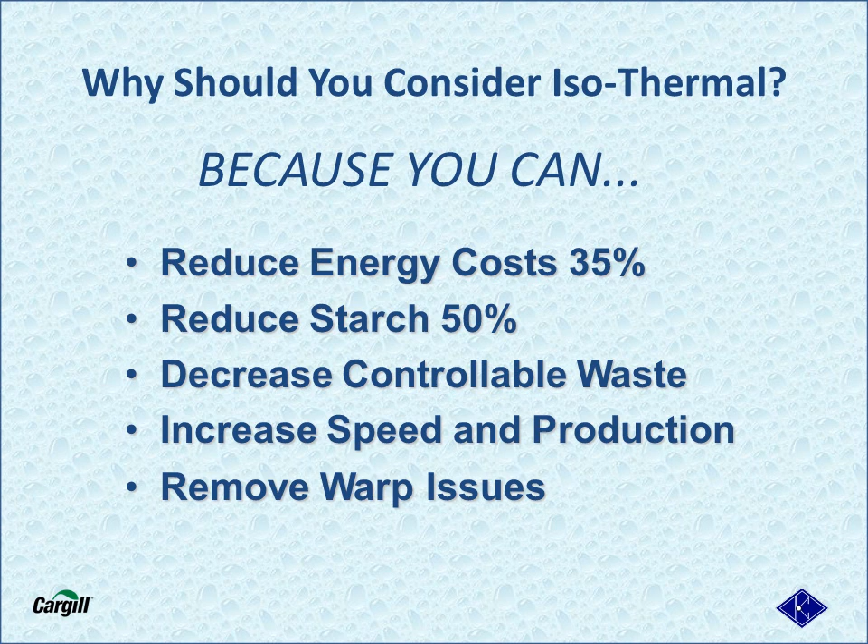Do you think these production improvements are achievable while still producing a flat board with equal or greater ECTs and pins? The answer is yes. If you're interested in better board, reduced waste, lower production costs, and higher profits, then take the next 5 minutes to learn how it's all possible with the isothermal process.

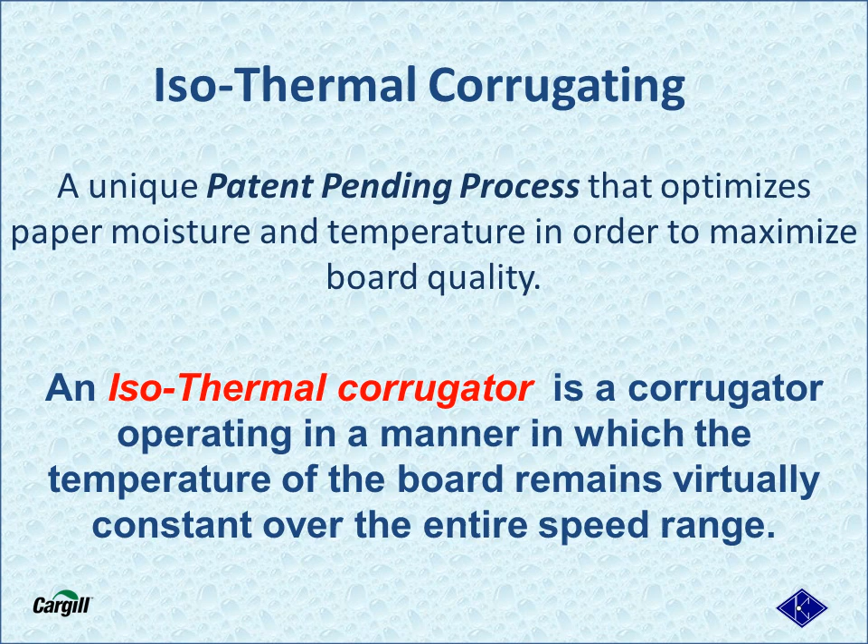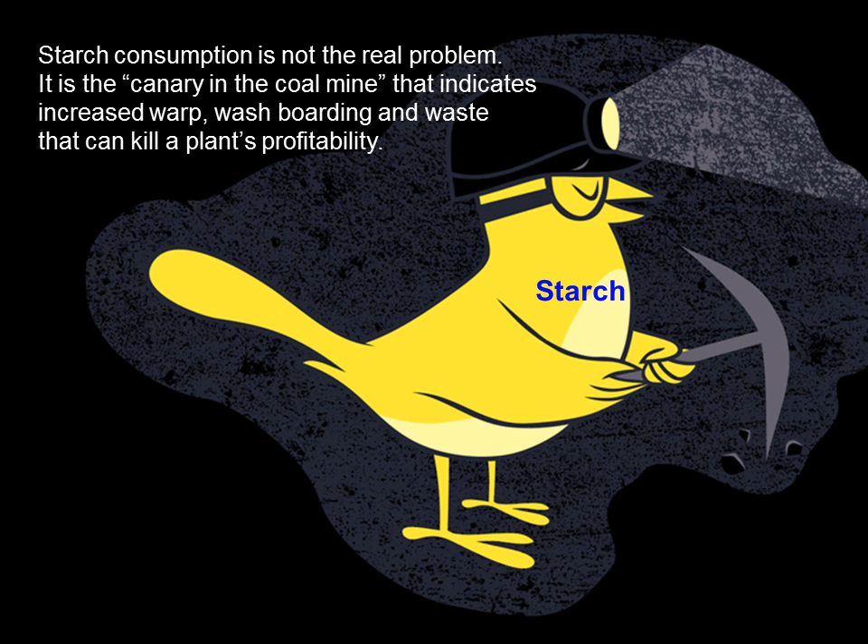Isothermal corrugating is a unique patent-pending process that optimizes paper temperature and moisture in order to maximize board quality. An isothermal corrugator is essentially a corrugator operating in a manner in which the temperature of the board remains virtually constant over the entire speed range. Starch consumption is not the real problem in corrugating. It represents a very small fraction of your overall costs, but it is a tremendous indicator of whether or not your corrugator is in control.

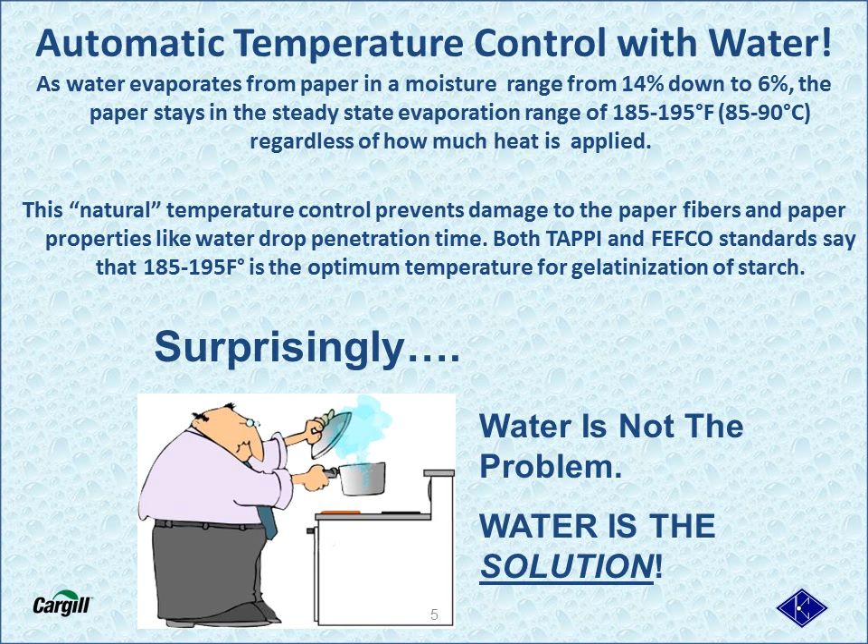Isothermal corrugating essentially provides automatic temperature control of the process by using water at its evaporating temperature. This natural temperature control will prevent damage to the paper fibers and properties like water drop penetration time. Both TAPPI and FEFCO standards say that 185 to 195 degrees Fahrenheit is the optimum temperature for the gelatinization of starch. This is the temperature that we maintain by applying a thin film of water to the medium and liners. Surprisingly, adding controllable moisture is the solution and not the problem.

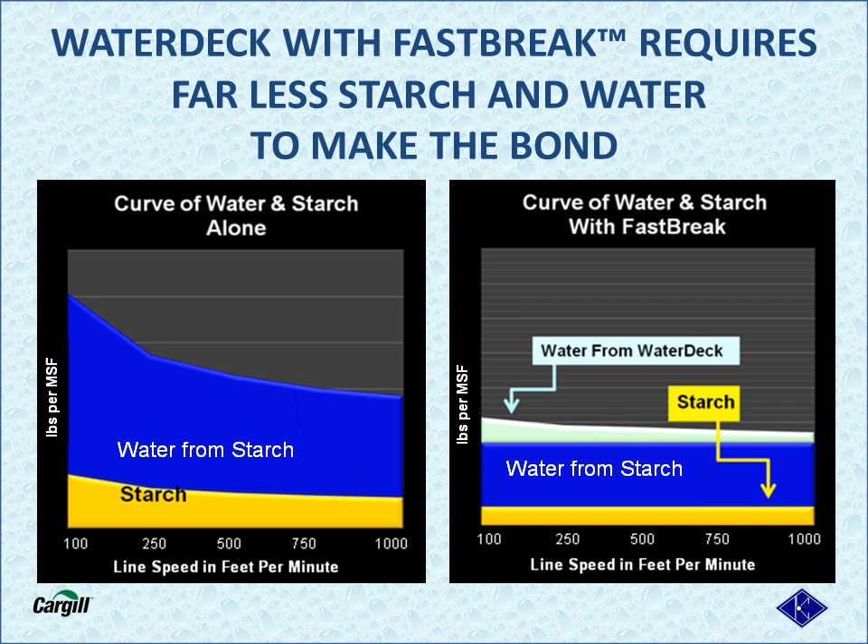If you take a look at these two graphs, they compare the curve of water and starch consumption on a traditional corrugator on the left and with an isothermal corrugator on the right. A traditional corrugator puts a lot of water and a lot of starch on at the lower end of the speed range. Isothermal corrugating enables you to flatline the starch at all speeds. Isothermal corrugating uses less total water during the entire process, and we adjust for the effects of speed and temperature by using the added control of the water decks.

There are 3 simple steps that are involved. Apply water, apply heat to the side that you applied the water, and then apply a rheology-modified adhesive.

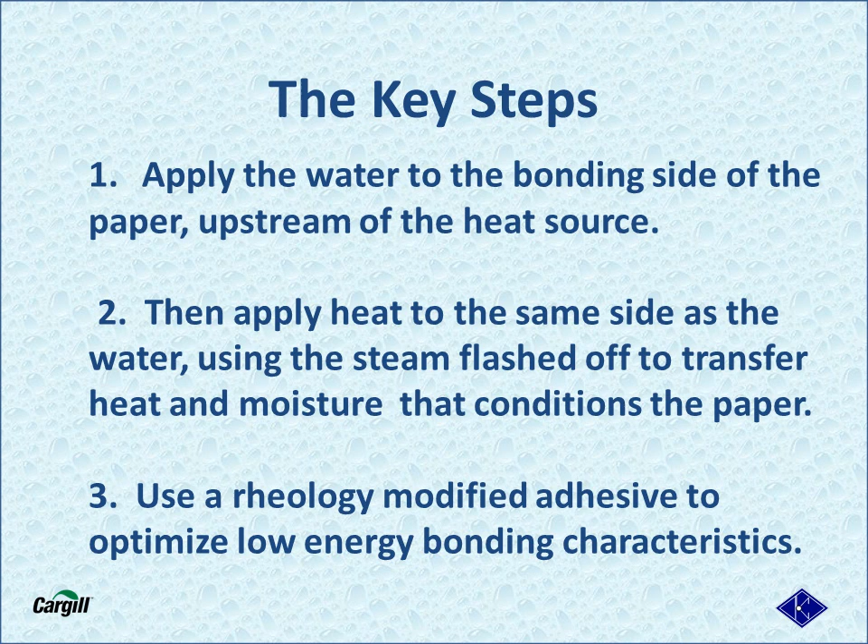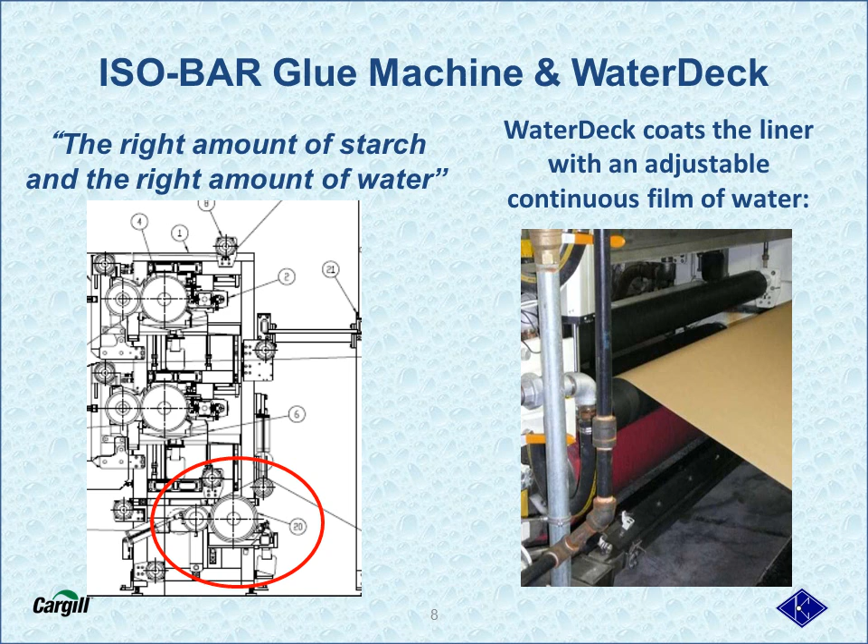Let's take a look at a few current installations. First is an ISO-BAR glue machine with an integrated water deck. Kohler custom builds each water deck specific to your corrugator's size requirements. As you can see in this recent installation, the compact water deck is very small and leaves a minimal footprint. The machines are completely automatic and require very little attention from the operators on the floor. The biggest changes these machines have on your plant are the huge financial savings and improved board quality.

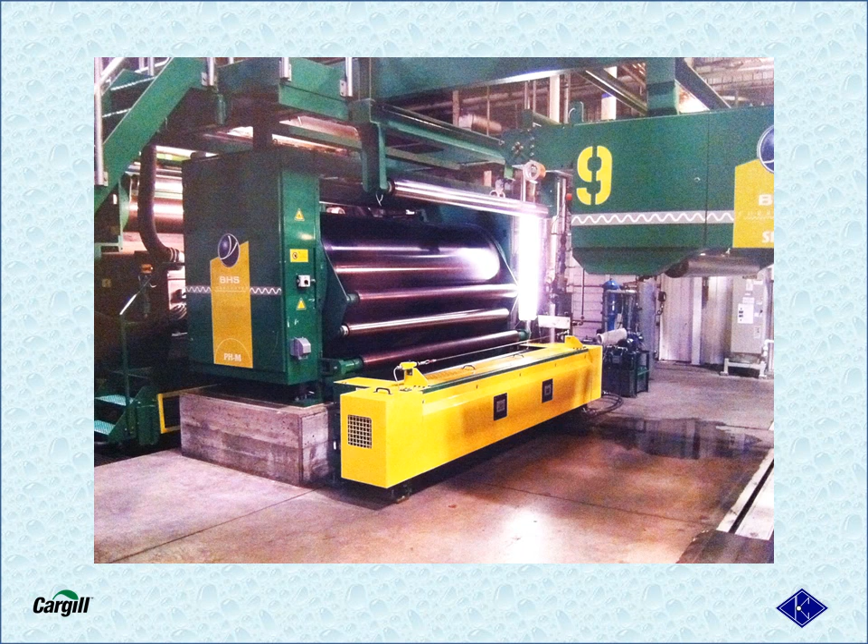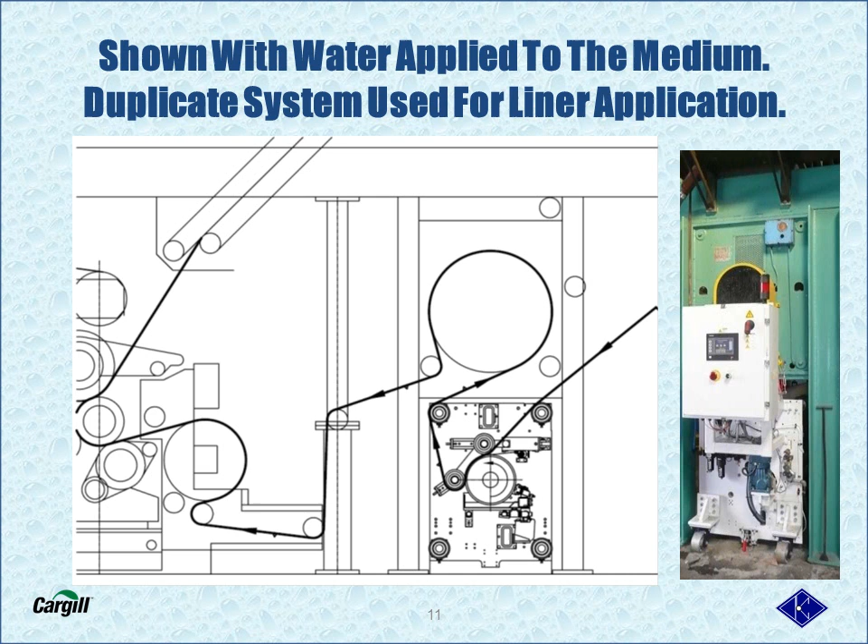For really space-restricted corrugating lines, we offer an even smaller version, the micro water deck. In this particular application, the customer really didn't have enough room to install the water deck beside their preheater, so we simply raised the preheater and put the water deck underneath. We've mounted water decks above and below preheaters. As you can see, this application can be installed on any corrugator.

Isothermal corrugating has specific adhesive film thickness requirements. Let's take a look at an isobar glue machine where we've got a 3 thousandths or 75 micron film thickness of starch on the roll. It's almost translucent because it's so thin. Isothermal corrugating allows us to use these kinds of film thicknesses because we change the flow characteristics of the adhesive with the addition of Cargill's Fast Break rheology modifier. Without Fast Break, adhesive film thicknesses lower than this are not possible because of the physical and chemical limitations.

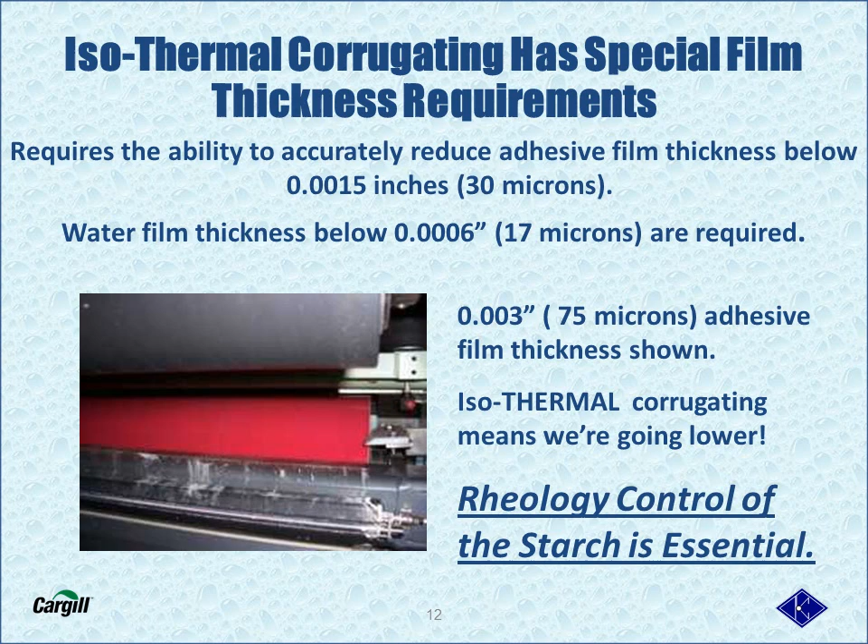We all know what the glue gap limitations are with a typical single facer. Look at how these glue gap limitations are affected on an isothermal corrugator. With an isothermal corrugator, you simply adjust the water that is needed relative to the speed. You do not change or adjust the amount of starch. You run a constant glue gap over the entire speed range. This allows for less starch use while accomplishing the same or better level of bonding, achieving the same or better board characteristics at all speeds.

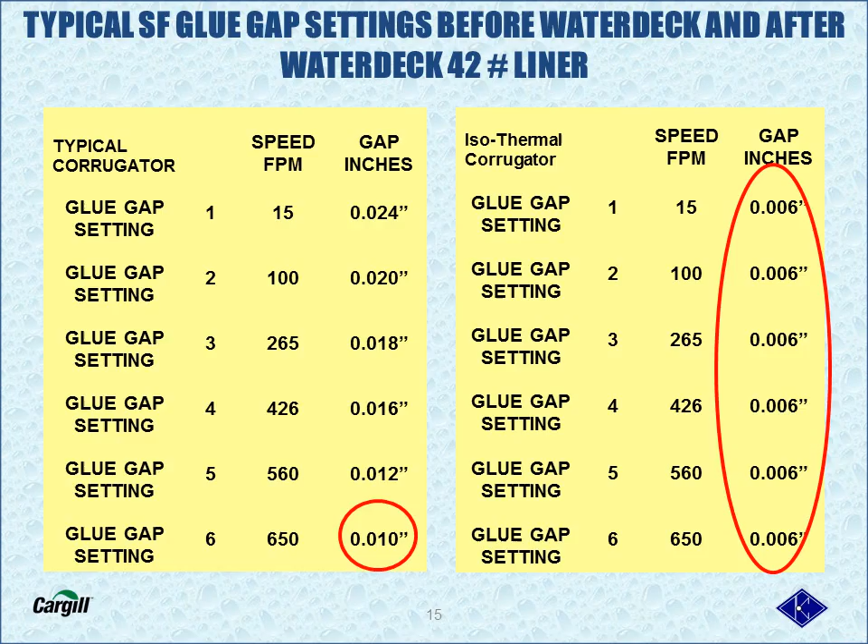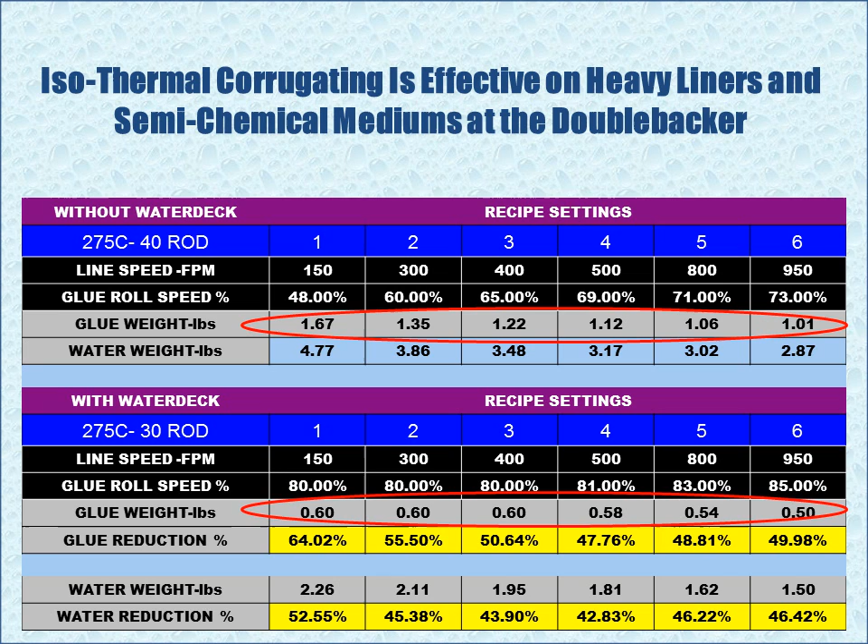An isobar glue machine used with a typical corrugator can reduce starch consumption considerably, as we can see here. But look at the performance of the isobar glue machine on an isothermal corrugator. The glue line stays flat over the entire speed range, and you can even taper it off a little more at higher speeds. Water reduction, the total amount of water reduced in the process, varies over the speed range from about 52% at the lowest speed to 46%. Glue reduction varies from about 64% down to 50% over the speed range at the double backer.

This chart represents the temperature taken with the temperature gun just as the bottom liner exits the double backer. Something that we all know is when you slow down a typical corrugator, the temperature of the board climbs significantly because you don't have the ability to shed heat as fast as the speed changes. As the line speeds up, even though you might be putting down ballast rolls on a typical double backer, temperature is going to fall off, and then eventually at the highest speeds, the board will be within a range that might be considered acceptable in a typical corrugator.

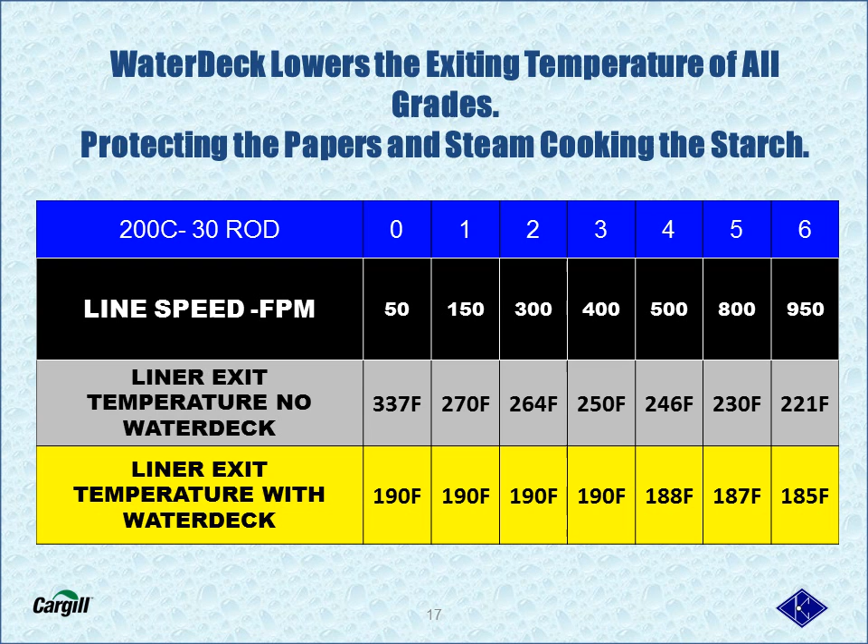On an isothermal corrugator, you can lower the exit temperature even further, but look how flat the speed curve is versus temperature. As the speed goes from 50 to 950 feet per minute, there is only a 5-degree change in temperature on the bottom liner. Thus the name, isothermal corrugating, where you can now maintain a constant temperature over the entire speed range.

The bond is superb at any speed. Over a wide speed range, we maintained exceptional bonding so strong, in fact, that we pull the inner ply of the liner off with the medium, instead of getting failure between the medium and the liner.